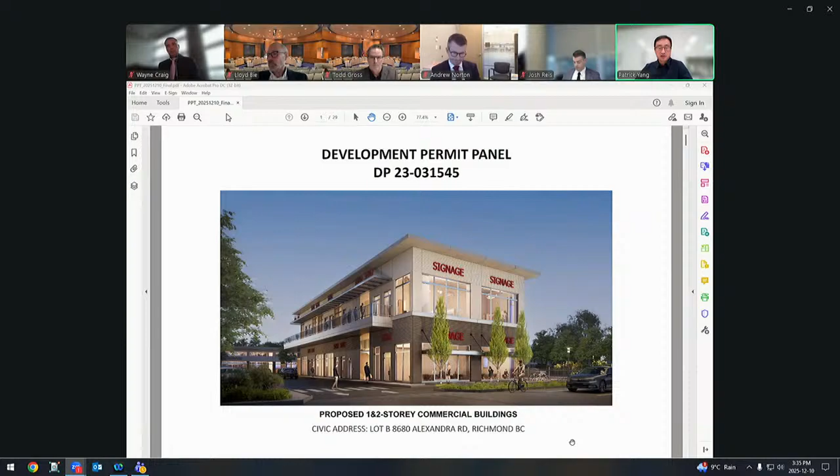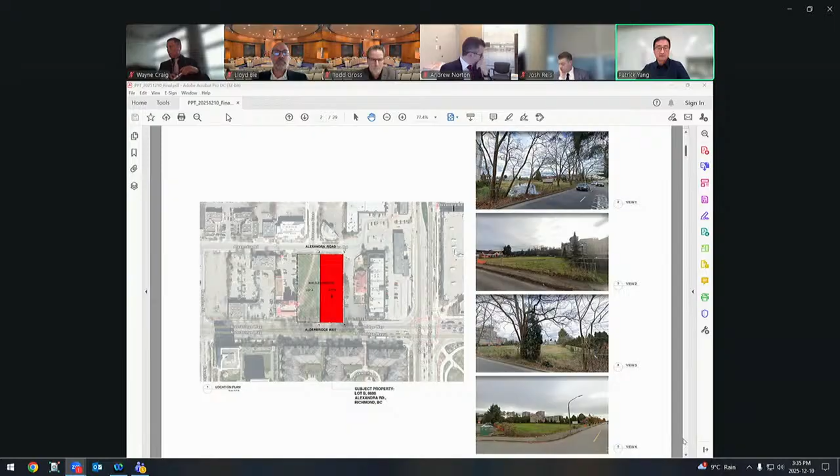This development includes 2 buildings with a total of 14 commercial units. We have worked closely with the city staff to address key urban design issues, ensuring the development aligns with the city's applicable standards and guidelines. The site is a double-fronted lot facing Alexandra Road to the north and Alderbridge Way to the south. The site is currently vacant and located in a C zone.

Given the property's frontage on both Alexandra Road and Alderbridge Way, 2 buildings have been proposed. This configuration promotes architectural variety, enriches commercial opportunities, and creates a welcoming urban streetscape along both streets.

To enhance pedestrian connectivity and accessibility, a 3-meter wide pedestrian path has been proposed between Lot A and B, connecting Alexandra Road and Alderbridge Way. This safe, connected pedestrian path ensures convenient public circulation. A 1.5 right-of-way will be registered on both Lot A and B.

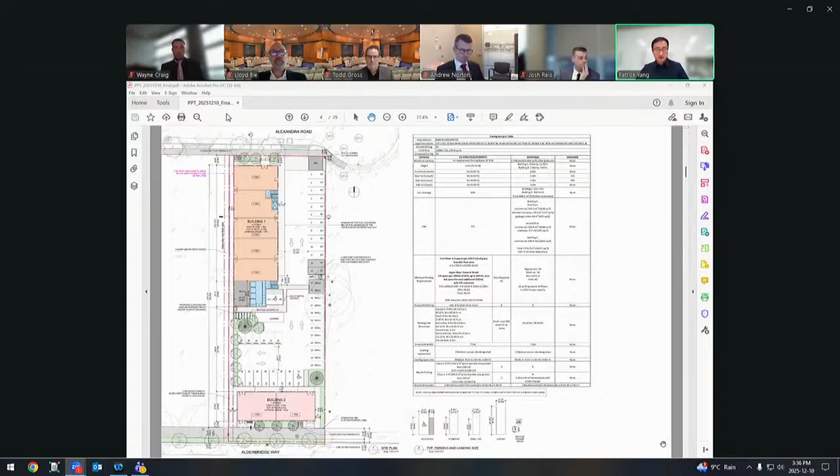Building 1 is a two-story building with 12 commercial units. Waste recycling and mechanical rooms are proposed at the south end of the building.

The building has a street front facing Alexandra Road with a strong architectural expression using large windows, doors, and canopies. The proposed design states a modern Pacific Coast architectural expression, incorporating significant horizontal articulations, along with variations in color, texture, and materials to create an attractive and engaging building.

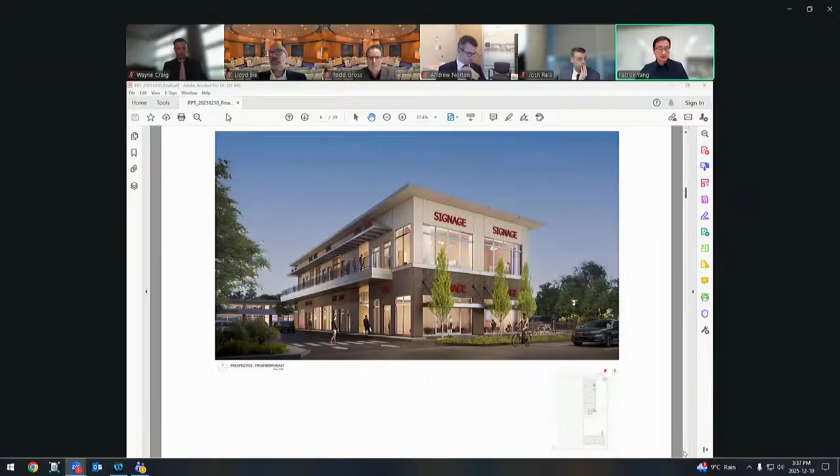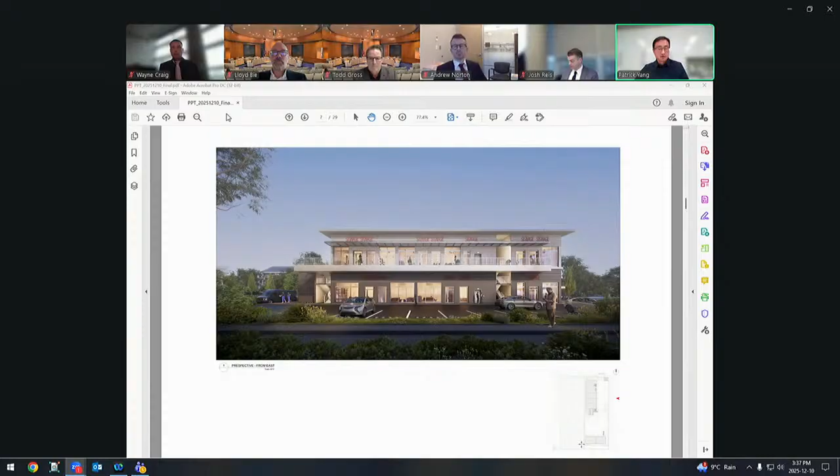On the upper level, an outdoor corridor and an amenity terrace at the south end of the building have been proposed. It helps to create natural surveillance for the driveway and the surface parking area below.

Elements such as outdoor corridors, canopies, and roof projections enhance the horizontal interest across the linear facade. The design of the west building elevation provides a safe and nice pedestrian experience. Large windows and well-positioned doors, together with continuous canopies for weather protection, will increase transparency and visual connectivity between the pedestrian path and the commercial units.

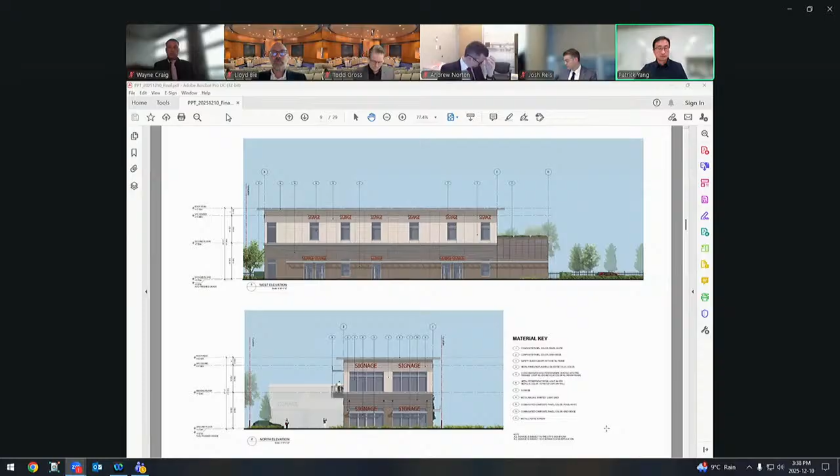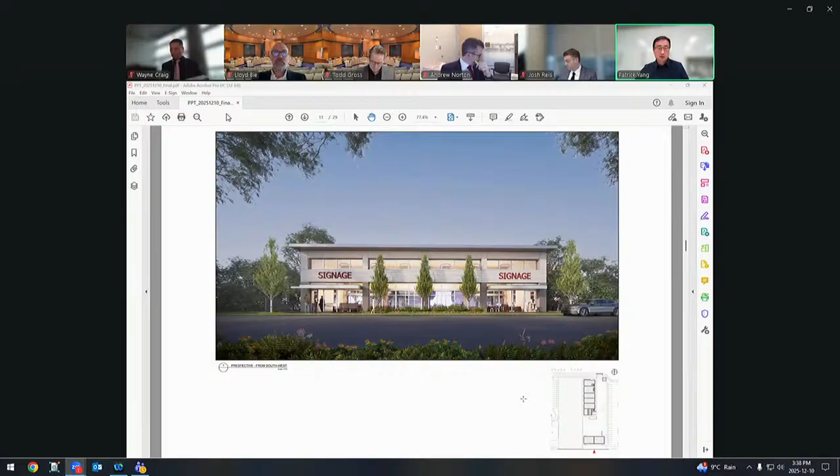Building 2 is a one-story building with 2 units, providing a continuous storefront facade. The large windows and glazed doors, combined with canopies and roof projection, create a strong horizontal expression. The overall design emphasizes small-scale commercial activity with a focus on creating a pedestrian-friendly environment.

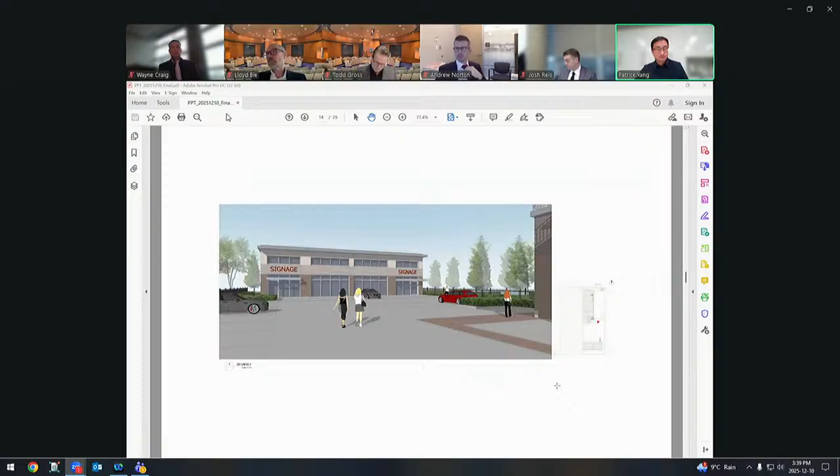Architecturally, sustainability measures have been included in this project by using high-performance building envelopes, LED lighting, and optimized HVAC systems. Mechanical design allows connection to the city's central district energy utility. Water and energy conservation features, including low-flow plumbing systems, will be used in the project. The project will also provide roughing for future rooftop solar panels as an alternative energy source for future tenants.

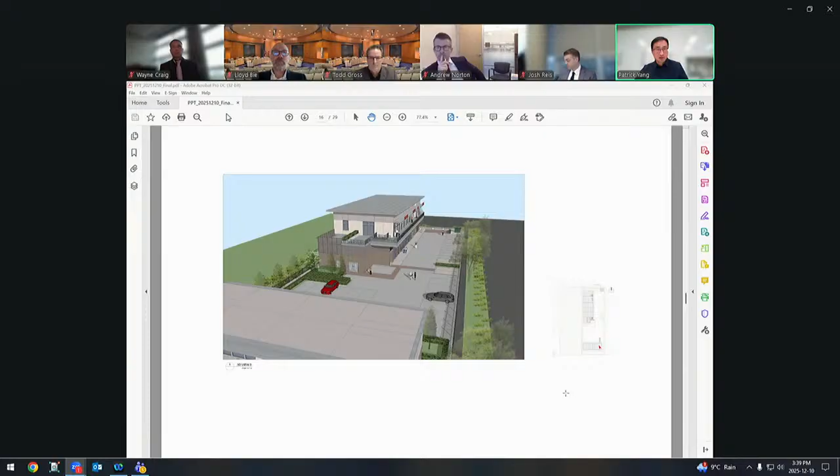The selection of exterior finishes emphasizes enhanced durability while adopting a sustainable approach. Colors and materials are organized to achieve harmony and connectivity throughout the buildings. Building finish comprises a mix of architectural composite panels, with colors focusing on warm gray and light tones. Each floor's composite panels have a smooth finish below and corrugated finishes above to add texture and improve street-level articulation.

We believe this development will bring values and benefits to the public and the city. Next, the landscape architect will present the landscape part of the design.

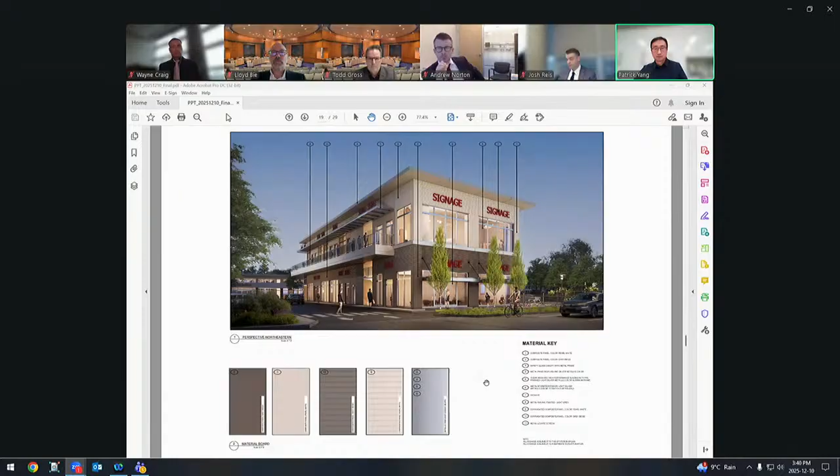There are 4 items to be discussed in the landscape presentation. The first item is the existing tree management.

As you can tell from the screen, there are 2 trees on the neighbors' properties proposed to be removed per the suggestions of our arborist. Also, the trees along the Alderbridge Way will be removed due to the conflict with the future city sidewalk. In order to provide enough replacement trees, the overall landscape design has maximized the tree planting opportunities for the overall site.

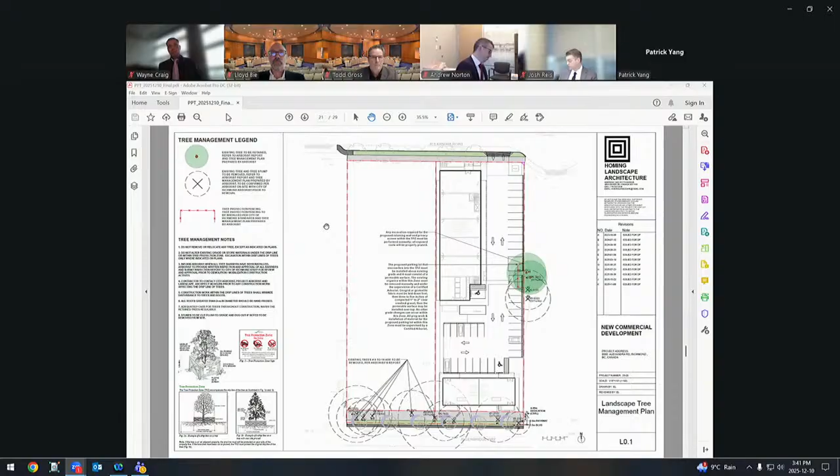Next page, please, Patrick. I believe the overall landscape design has proposed a total of 15 replacement trees on site.

Next page, please, Patrick. The second landscape design idea is trying to create a pedestrian-friendly environment for the users. As you can tell from the landscape site plan, pedestrian circulation paths are provided around building 1 and building 2. Meanwhile, a pedestrian path is proposed along the west property line as well to connect the Alderbridge Way and the Alexandra Road.

For the pedestrian circulations in the parking lot, we used stamped asphalt paving to highlight the pedestrian circulations, to make sure that we create a safe pedestrian environment in the parking lot as well. Next page, please.

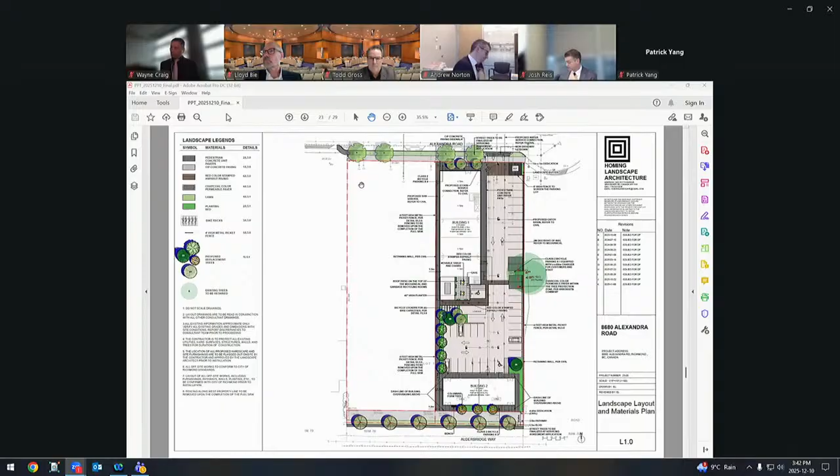The third landscape design idea is to use a lot of native and drought-tolerant plant species in the overall landscape design. As you can tell from the plant list on the left page of these screens, a lot of native species has been used based on their sun and shade conditions on site. We're trying to create an environmentally friendly landscape that also benefits the local ecology as well. Next page, please, Patrick.

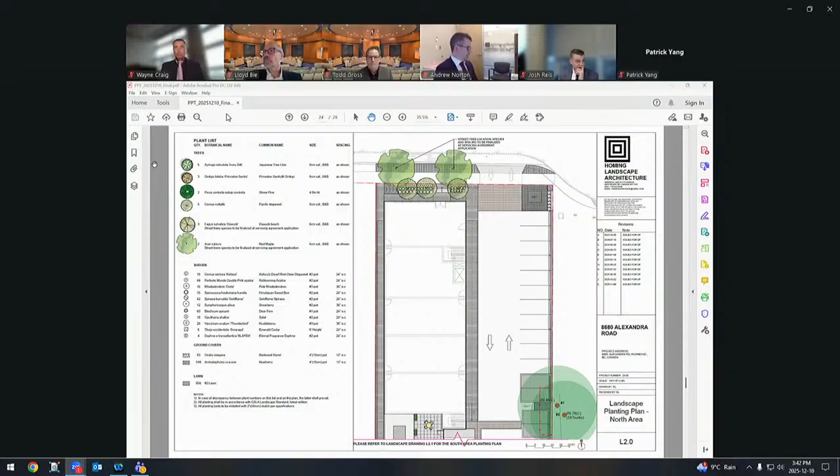The last landscape design idea is to create a safe place for people to use at night. So the overall landscape lighting design tries to use dark sky design principles to reduce light pollution to the neighbors as well. There are 4 types of landscape lighting proposed on site, and no uplights will be used on the project.

For the parking lot areas, we will mainly use parking lot pole lights with a shield to provide enough light. For the circulation paths around the buildings and along the west property lines, we propose to use a bollard light and a wall-mounted downlight to provide lighting for pedestrians. So the overall landscape lighting design intends to create a safe environment at night for people to use.

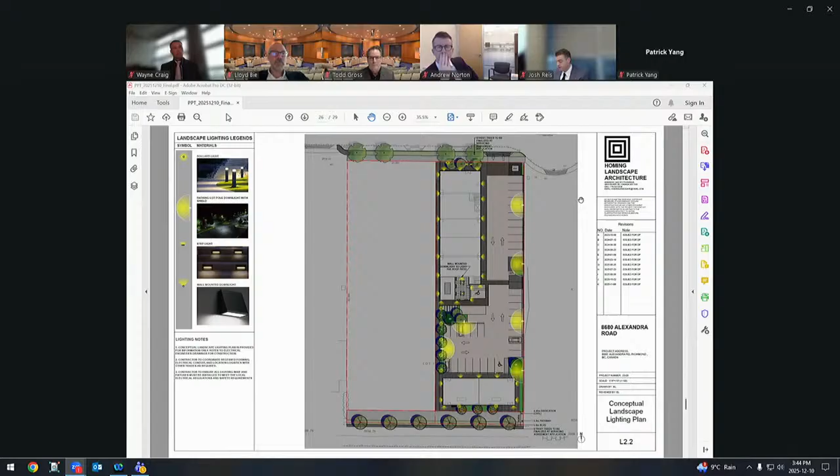Next page, please. So we have considered some landscaping materials. For example, we have used permeable pavers for some parking areas. We also use a 4 foot high metal picket fence along both the west and east property lines to make sure you can see through and to create a safe environment for users on site.

This is the overall landscape presentation. Thank you. Thank you for your presentation. If that concludes your presentation, you can stop sharing your screen.

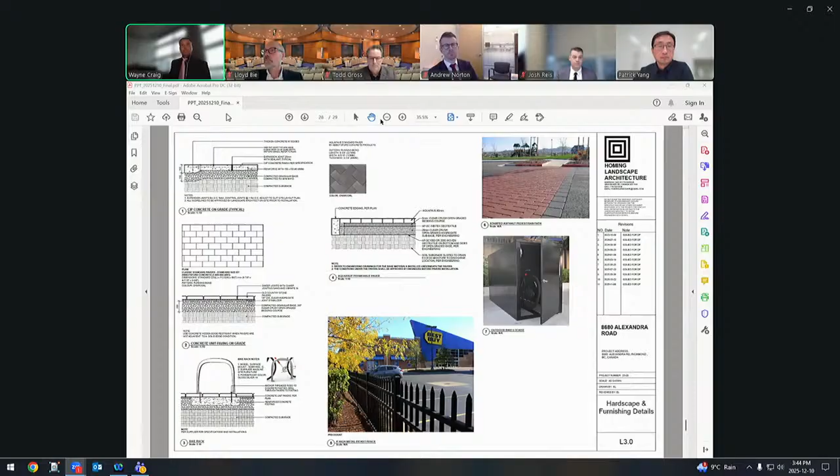Josh, any staff comments? Yes, a few comments, Mr. Chair. As indicated by the applicant in their thorough presentation, a 3-meter wide SRW providing pedestrian right of passage between Alexandra and Alderbridge Way is proposed. The buildings have also been designed to address this walkway area as another active frontage to the building. The buildings are located within the city center district energy utility area and have been designed to connect to the city center DEU once connection is available.

There is road dedication associated with the proposed development along Alderbridge Way, and there is a servicing agreement required at the time of subdivision that will include frontage works, including a multi-use path and boulevard, together with utility and servicing connections. That concludes staff comments. Thank you.

Lloyd, Todd, any questions for staff or the applicant? Yeah, thank you, Mr. Chair. I do have a couple, if I can go first.

I was wondering, there are quite a few trees along the front of it, and I think I read in the package that they're not great trees and stuff. But what I was wondering is about the replacement trees along the front - will they kind of mimic what's in other places? Like when we look on Alexandra at the roadway, there are a number of street trees on the opposite blocks and things. I was just wondering if these trees will match those. And along Alderbridge, what will that look like? As we go along, we see that a bunch of those trees in the front will disappear. Further to the west, there is a row of trees. So will these all match, or will they be different, how will that look?

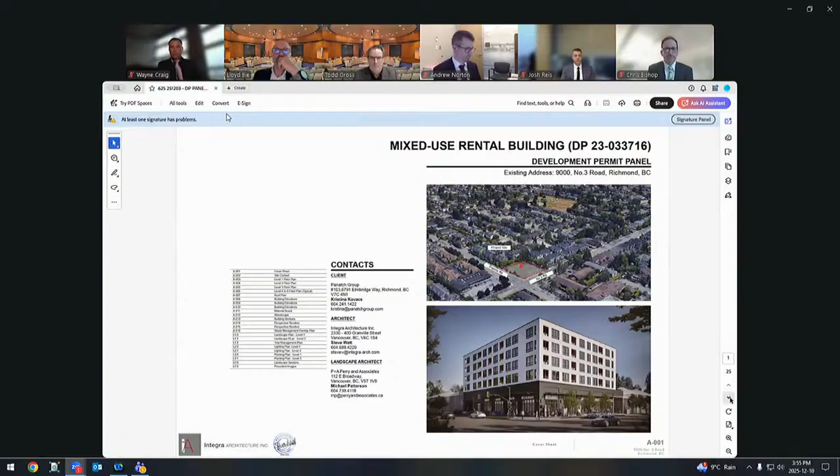So the site occupies a prominent corner location at number 3 and Francis Road. It's a former gas station site, flanked by townhouse projects on the east and south sides and a low-rise commercial development across the street to the west.

The site has a number of constraints that have limited or influenced our design. It is contaminated land, and there's a high water table being in Richmond, which limits our excavation options. We don't have a lane, which limits access and servicing opportunities.

We have an SRW on the east side, which limits our buildable envelope and tree planting opportunities. We're also respecting the 2-meter road dedication and 2-meter setback on the west and north, and a 5-meter corner cut, all of which compresses the buildable envelope. On-site garbage collection is obviously a challenge too, restricting our turning and operational movements, all of which has heavily influenced our back-of-house design.

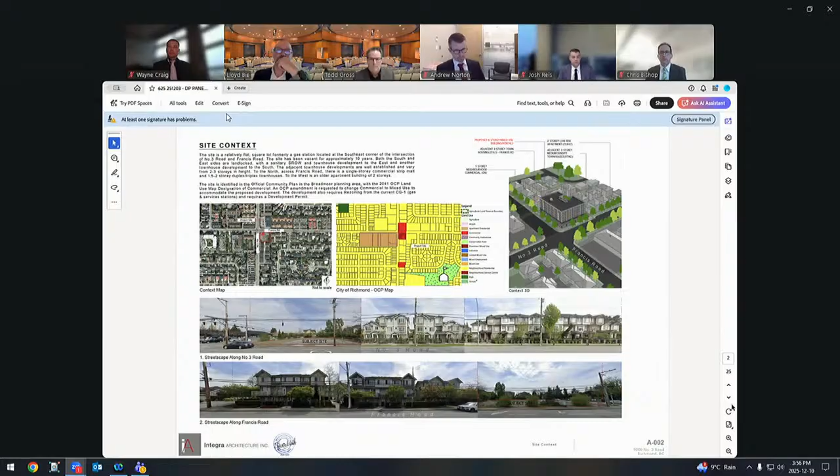Level 1 site plan: our design strategy basically allocates all the commercial to the principal public street fronts, connecting it all to maximize flexibility. Then we have the residential lobby on Francis further to the east. Parking forms the balance of the remainder of the site and accommodates the garbage storage and collection requirements. We've got 2 parkade entries, located as far from the intersection as possible.

On level 2, we've added additional parking to meet the needs of the development, making use of the 2 possible entries, one for the lower level, one for the upper level. We looked at an internal ramp, but that works out to be completely impractical given the space requirements. To accommodate the garbage collection, the building needs to be stretched vertically, which in turn increases the commercial and residential lobby height.

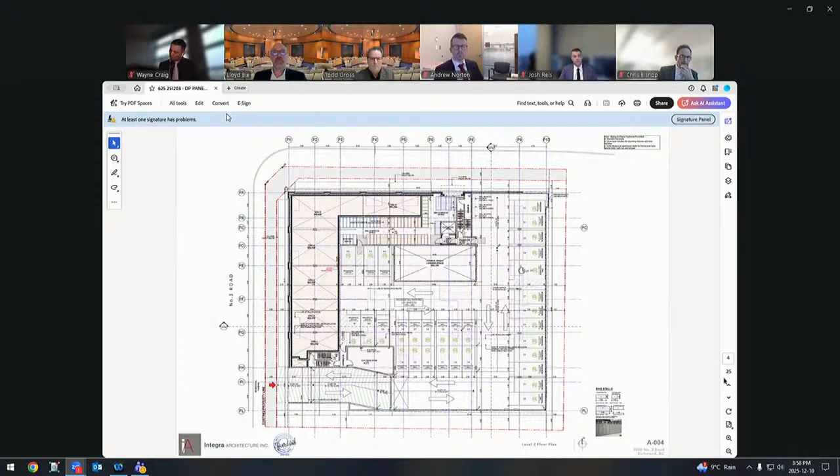Level 3 is the podium level on top of the parking and the commercial units. This is where the residential units begin. On levels 3 through 6, to respect the lower density and height of the neighbouring townhouses and to mitigate privacy and overlook concerns, the residential hugs the north and west property lines and is pushed in from the east and south to maximize the setback to the existing buildings.

This creates an outdoor space opportunity on the southeast corner of the parking podium on this level for the common outdoor amenity. It's an ideal location that takes full advantage of sun for much of the year. The space is also overlooked by about half of the units in the building, providing natural surveillance, which will encourage use and a sense of community. It includes a children's play area, urban gardening, and social gathering spaces, which Michael will touch on further later. For the size of the project and contribution to the community, it was decided more rental units were a better use of the space rather than providing an indoor amenity space.

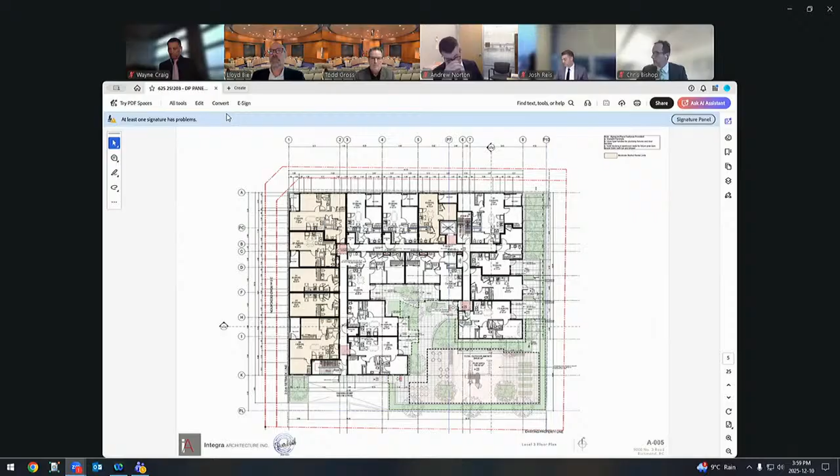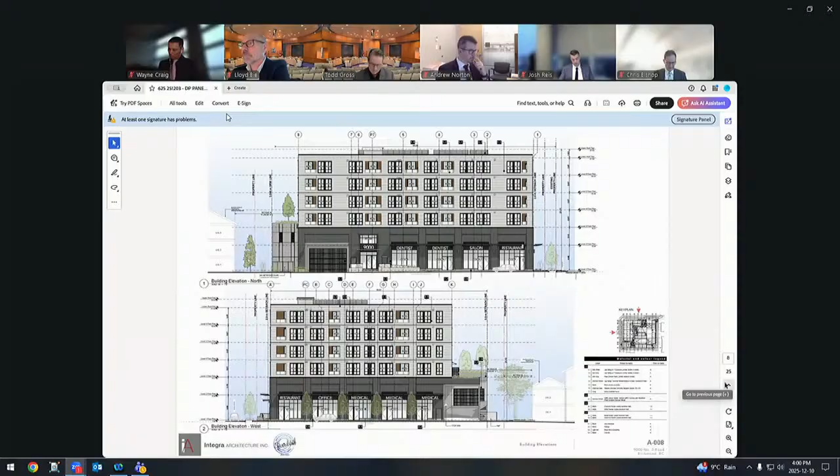We have a brick podium base proposed for the commercial frontage on the 2 public street fronts, with tall storefront glazing and a continuous glass canopy. The brick will have some nuance to it with some recessed areas to better express the commercial frontages.

The architectural expression we're aiming for is a very modern, clean form approach with few simple materials. We're trying to create a simple grid pattern of openings in a field material on a contrasting base to anchor the project and describe the transition of uses. Balconies are considered cozy private nooks, clad inside with wood-tone fiber cement material, adding color and warmth under the overall skin of the building. We've worked hard to avoid side-by-side balconies to improve livability and privacy. Materiality and form are purposefully simple; the design strength is in its simplicity.

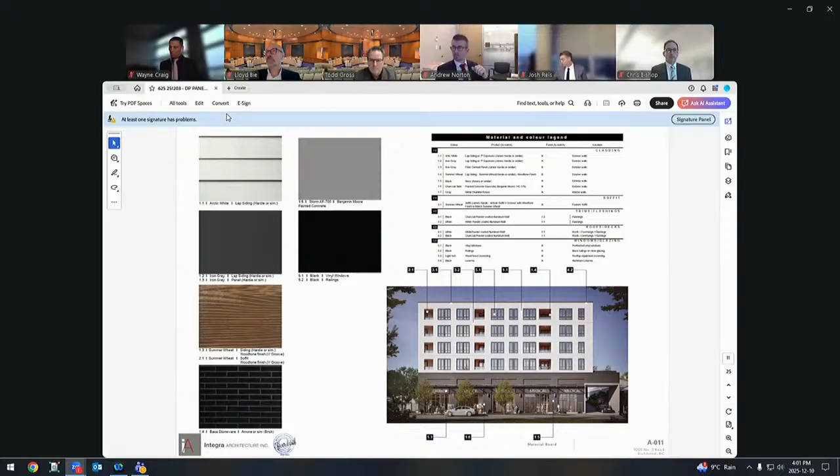On the south side, we've provided 7.9 meters between the townhouse and parkade, and 14.26 meters from the townhouse to the apartment building. These measurements are to the side yard conditions. There are 2 townhouse buildings where there is a rear setback condition, and those setbacks are exceeded even further.

Various measures are proposed to reduce potential conflicts between pedestrians and traffic entering and exiting the parking, particularly the upper parking. This includes contrasting colored drive aisle signage and convex mirrors. They're obviously right-in, right-out as well.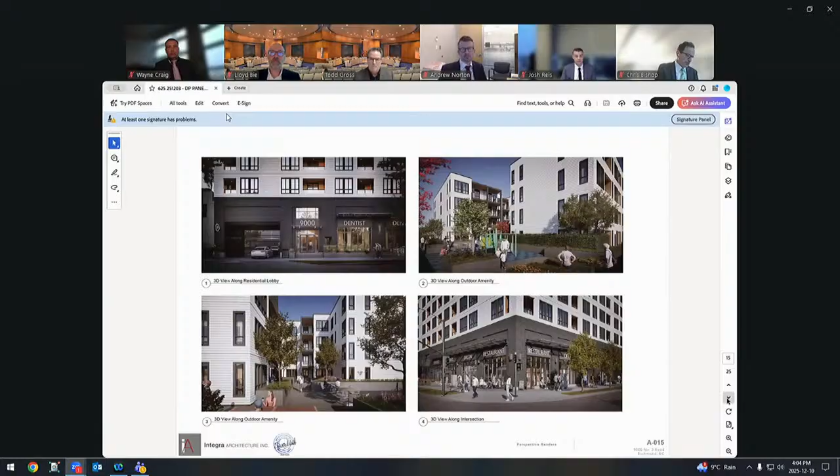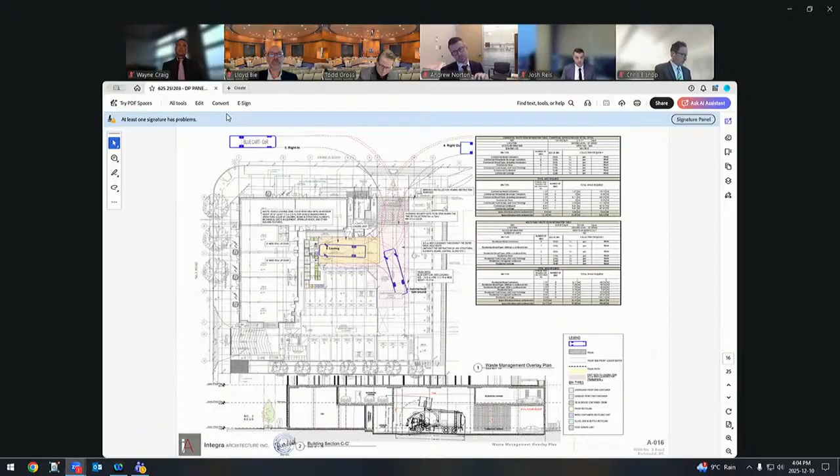Next page would be the servicing plan, which shows how it was a challenge, but we managed to make all this work with the full turnaround for the garbage truck, and we have an extra height area for the overhead tipping maneuver. I'll now pass to Michael for the landscape presentation.

Thanks, Steve. Yeah.

So this is the ground floor plan, and you can see that we've got an urban streetscape along both Francis Road and Number 3 Road, and we've articulated the CRU units with a planter separating the CRU units, and we've also provided the Class B parking. Similarly, on Francis Road, we've done the same with the CRU, and then you can see that the entry lobby is a little bit more separated or clearly established through a slight change in grade. So we have a few steps up to the entry lobby, or a 5% sloping ramp, and a little bit more landscape to articulate that entry.

Along the east side, as Steve already mentioned there's an SRW, so we're not able to get trees or permanent landscape installed along the east side. So we have a 6-foot height removable wood fence and pavers on grade, and then planting. On the south side, we are able to get trees, so we have 8 trees planted and then an understory of shrubs, giving a layered planting edge along that south side. And again, we have a 6-foot high solid wood fence.

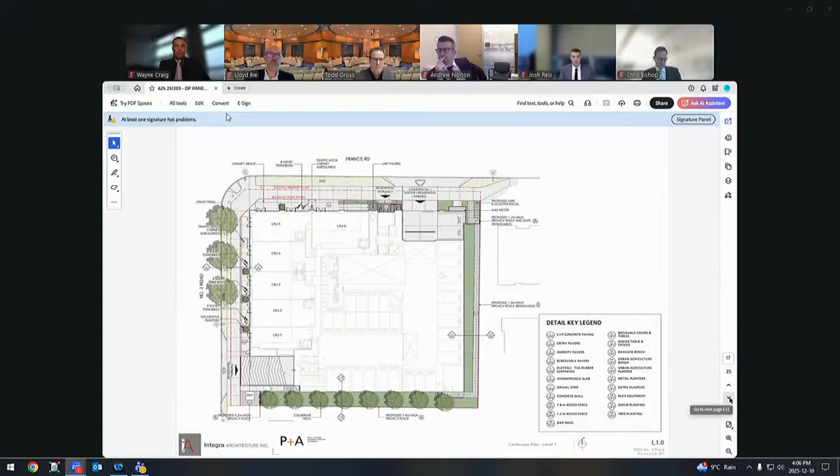The roof deck provides amenities for the adjacent units. So the units that have frontage on that courtyard are able to have patios that link out directly to the courtyard space, which helps to keep that space animated and provides good overlook for safety and security. As Steve mentioned, the building units above look down on this space. We've provided children's play, community gardens, and social outdoor dining, so a number of activities for the residents in the building. We have landscape planting around the edge to buffer that edge and views up, and we've provided a number of trees at this level as well to help provide shade during the summertime and again provide that layered planting scheme.

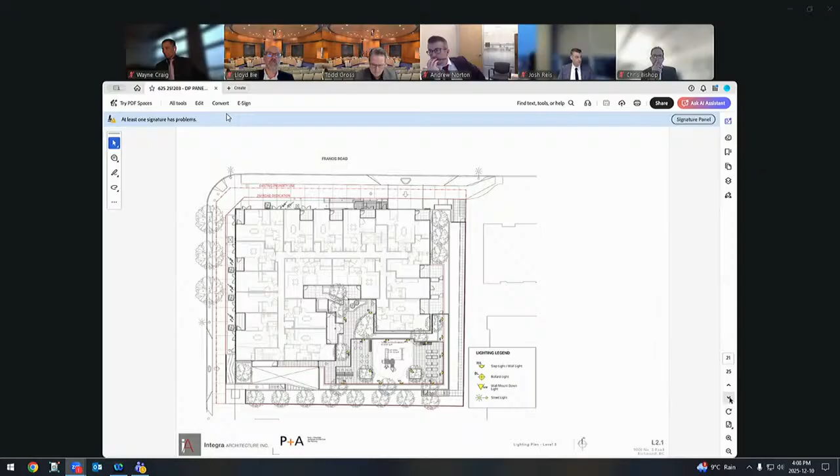We're providing a variety of plants, trees and shrubs. We do have vines specified to grow up the building face, both on the east and south side. And then, as Steve mentioned, we have plants on the upper level that are meant to come over the edge and soften it.

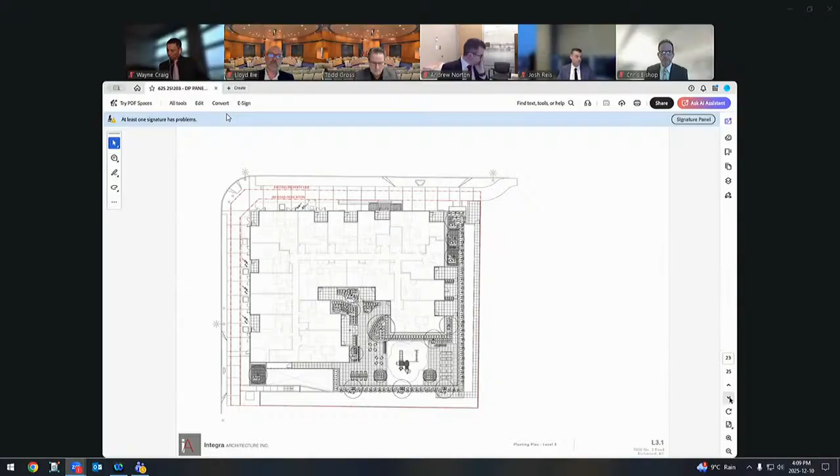This is our plant list for the roof deck. Again, a variety of plants providing seasonal interest. We really want to make sure the planting is inviting and looking fresh and green through the seasons, and is a lower maintenance type of planting so it's easily maintained by the strata.

These are some sections through the site. We have the commercial frontage on Number 3 Road at the top left, showing the bike racks, the sidewalk, and the street trees along that edge. Section 2 is in the statutory right-of-way and shows the fence, the pathway, and the plant material and vines growing up the wall. The one at the far right is the south building edge, a similar condition except with the addition of trees.

On the lower left, we have a section through the podium. We are providing ample soil depths for the trees, as you can see in these sections. Lastly, the lower one on the right is through the amenity area, showing the playground and the social seating and community garden area.

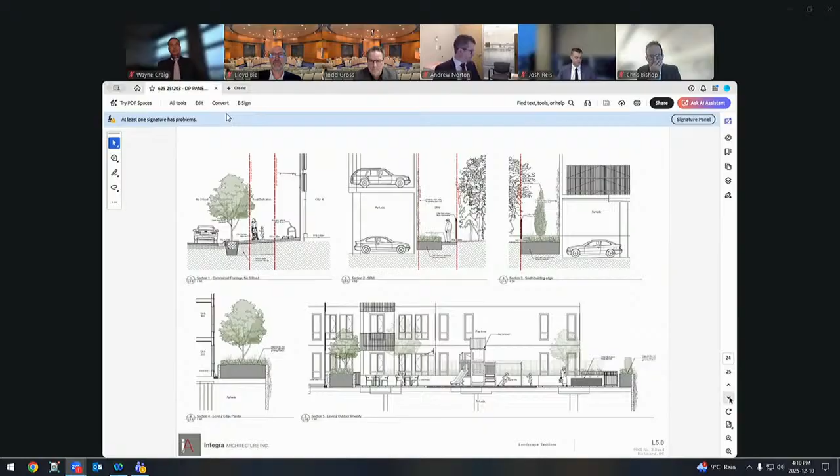That's the conclusion of the landscape presentation. Thank you very much.

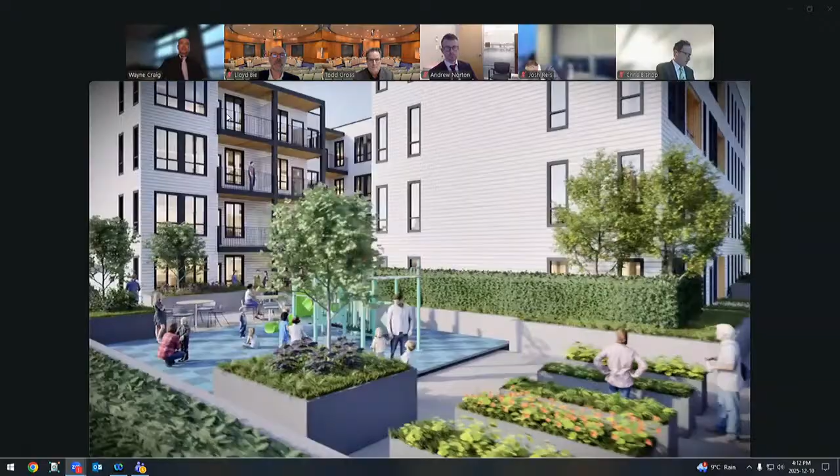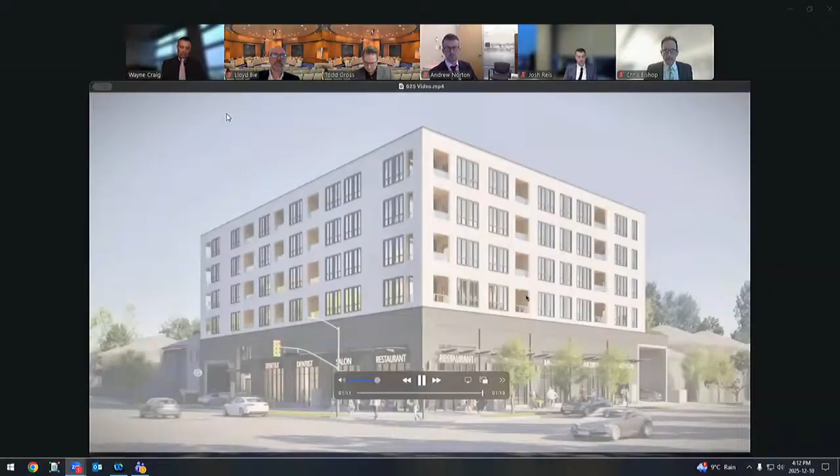Okay, that concludes our presentation. Thank you very much.

Josh, any staff comments? Yes, Mr. Chair. The proposed development is a 6-story building with 64 rental units, 7 of which were secured as moderate market rental units at the time of the rezoning application. All required replacement trees are being provided on site, and an on-site irrigation system has been provided to ensure the trees are adequately irrigated.

100% of the units on site will meet the city's basic universal housing requirements. In addition, there is a servicing agreement associated with the rezoning application, at which time we secured frontage improvements along both road frontages, as well as intersection upgrades, new traffic signal cabinets, storm upgrades, and sanitary and water connections. That concludes staff comments.

Thank you. Todd, Lloyd, any questions for the applicant or staff? Through the chair, I just have one landscape comment. On level 3, I noted there is a Styrax japonicus tree identified in close proximity to the playground, and given that they are prone to heavy seed and leaf drop, I would suggest replacing it with an alternate species.

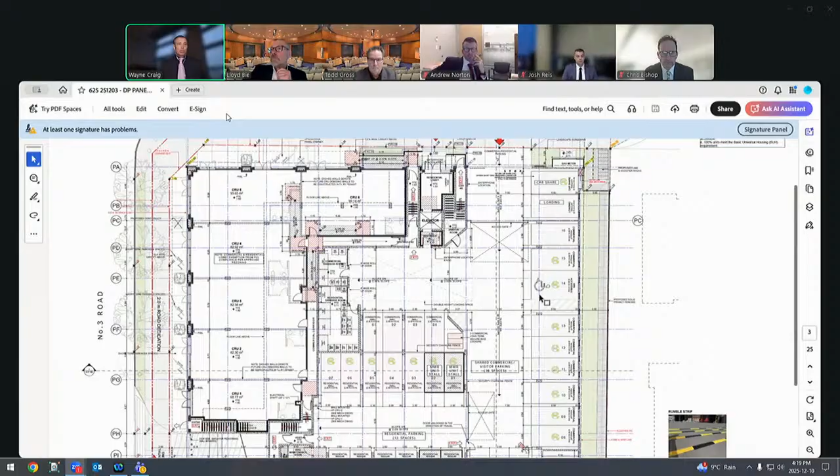Similarly, if you could just comment on any measures for vehicles exiting those two parkades, in terms of being aware of pedestrians using the sidewalk. So from the Francis entry, we don't have any mirrors or anything there, as we're imagining that would be a much lower speed entry exit.

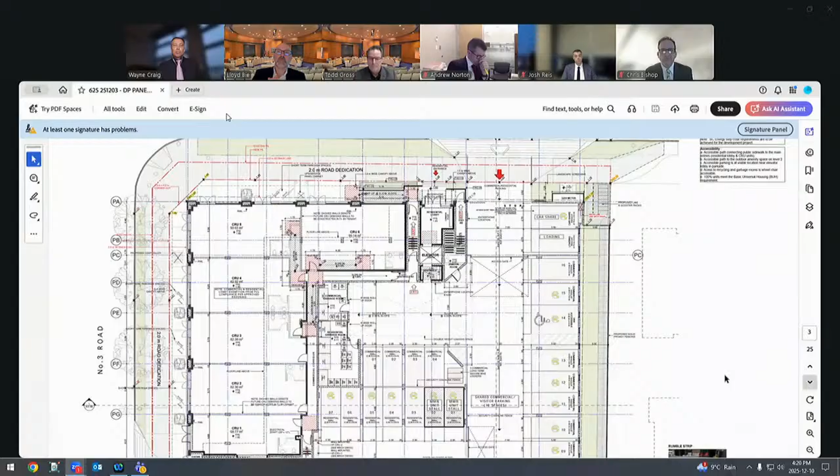Visibility is really good eastwards as you exit, and it's decent to the west as well, because we allow some space between where the effective enclosure of the parkade is and where the sidewalk is. So you're going to be almost at the sidewalk with full visibility through your side windows. On the second level, we are providing a rumble strip and convex mirror at the approach to the sidewalk. Strips, obviously, to control the speed of exit. Thank you.

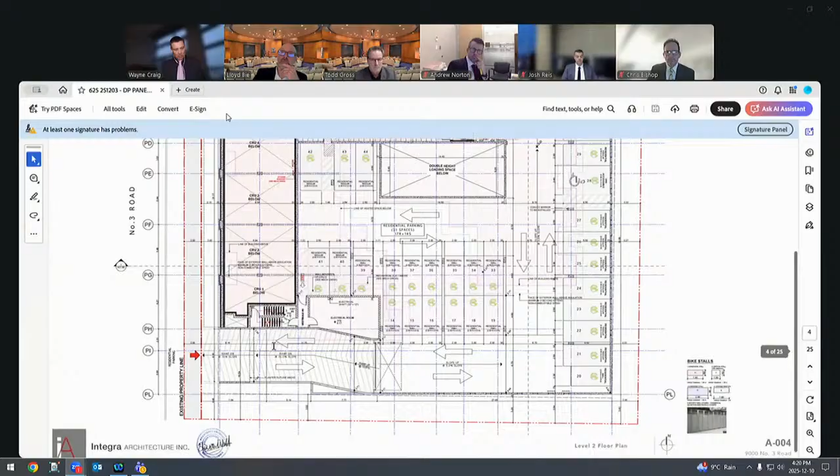Any public correspondence or members of the public wishing to address the panel today? Thank you, Mr. Chair. There are no speakers here in chambers, but we did receive a couple of correspondences from the public, and planning staff have responded. The first expressed concern about traffic safety and congestion at the intersection of No. 3 Road and Francis Road. The second expressed concern about the consultation process with residents.

Mr. Chair, if I may, to further elaborate on Mr. Bishop's response: the first piece of correspondence from Ken and Arlene Glynn concerned traffic at the Francis and No. 3 Road intersection. As part of the rezoning application, a detailed traffic impact assessment considered all traffic anticipated from the development and indicated it was not anticipated to have a significant impact. As part of the servicing and frontage works, there are required intersection signal improvements, including a new signal box, to help with left turn traffic from both the north and south approaches.

The second piece of correspondence is from Chris Jensen. Staff have again responded, and received correspondence from the applicant indicating the developer has worked with the neighboring strata. The proposed improvements along the east property line include a new 1.8 meter tall fence, as well as landscaping and vines along the eastern elevation to soften the interface with the existing townhouse development to the east. Josh, along that last point, is there an irrigation system to feed those vines to ensure they thrive?

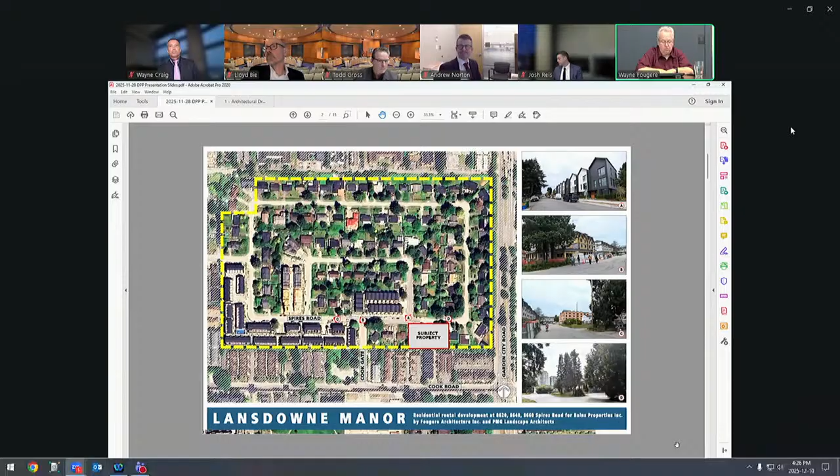In July 2022, Council approved a rental tenure policy that dramatically increased the potential for rental housing in the Spires Road area. The original 1.2 maximum FAR for multifamily developments in the area was rescinded. In its place, new developments now require a minimum FAR of 2.0 and permit a maximum of 3.0 FAR. The first 1.2 FAR is permitted to be strata or market rental. 50% of all additional density must be developed as LEMR housing, with the remaining permitted as market rental.

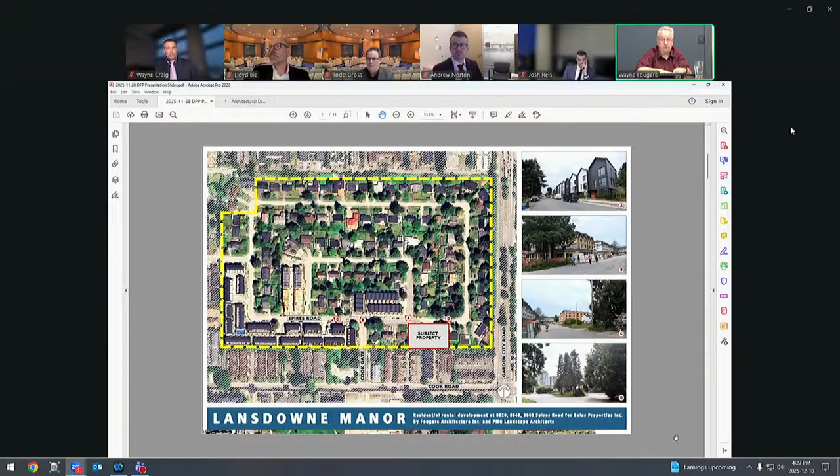Based on this policy, our project is being developed as a 100% rental building. This 3-lot consolidation is a net area of 2334 square meters, and on it we're proposing 90 homes in a 6-story building consisting of 5 stories of wood frame construction over a non-combustible ground floor. 68 of the homes will be market rental, and 22 homes will be affordable rental housing. The development has a density of 2.73 FAR.

There are 27 parking spaces including a car share and 2 accessible parking stalls. Transportation demand management measures include a transit pass program, provisions of a car share facility, and a small-sized loading space.

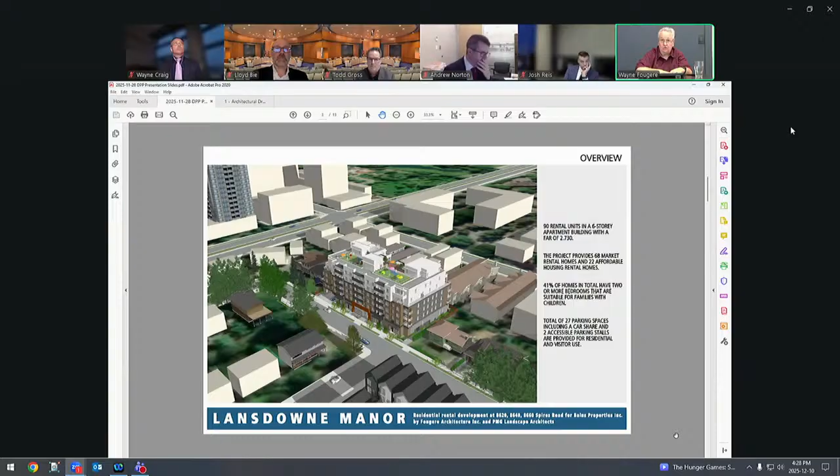The ground floor is positioned centrally on the site with the pedestrian and vehicle entrance off Spires Road. The parkade and service rooms are screened by a centrally located entrance lobby, an indoor amenity space, and 4 ground-oriented units facing the street. The vehicle access is provided at the east side of the building. There are walkways on the east, west, and south yards that provide exiting from the building and access to several service and bike rooms. All on-site walkways are at least 1.6 meters wide and have a maximum slope of 5%.

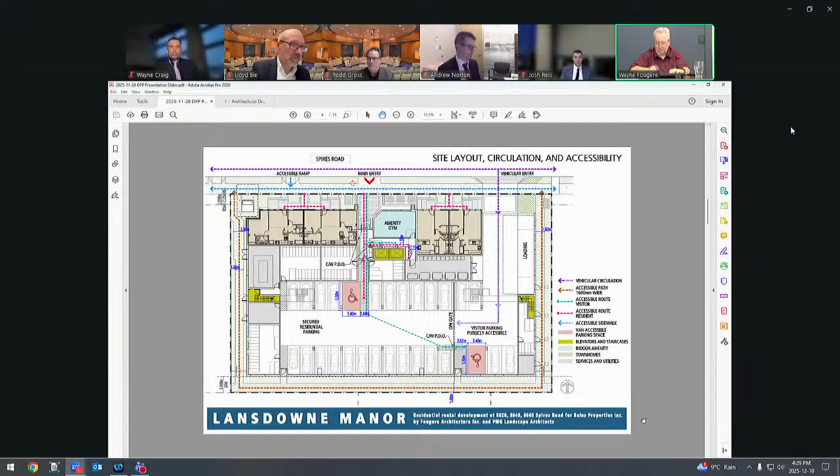The building above the ground floor is a U-shaped building oriented to the south to maximize sunlight penetration for homes facing the podium courtyard. The top 2 stories have increased setbacks along the east, west, and south yards.

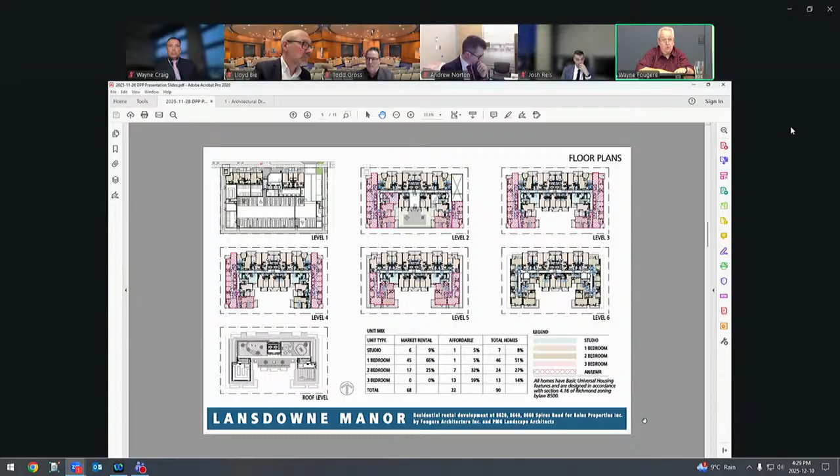All homes have basic universal housing features, designed in accordance with Section 4.16 of Richmond's zoning bylaw. Aging in place features will be provided for all homes.

The indoor amenities are located on the 1st, 2nd, and 6th floors. There are 5 amenity rooms, including the 43 square meter gym near the entrance lobby, the 51 square meter multi-purpose room that has access to the podium open space on level 2, a 40 square meter guest suite on level 2, a 12 square meter shared workspace, and a 12 meter conference room on level 6.

Common outdoor spaces are located on the podium and roof levels. And now Ewan will talk about the outdoor space and programming in detail.

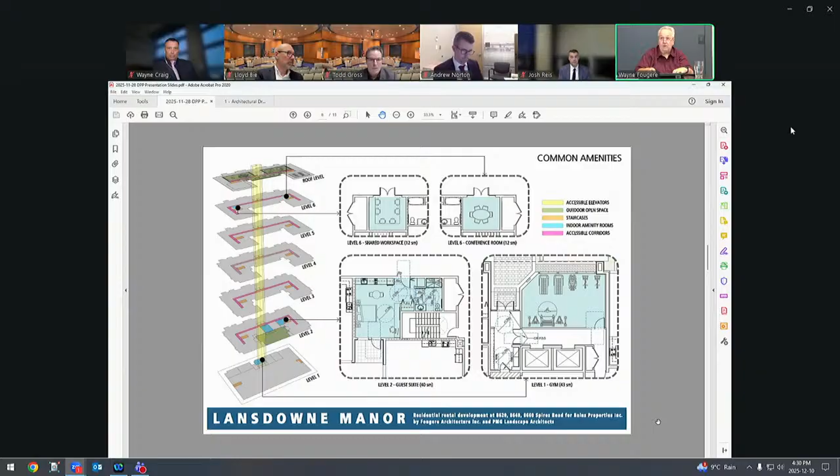Thanks, Wayne. In terms of the landscape along the road frontage, which is the north property line, our goal is to create a streetscape that feels attractive, welcoming, and friendly for the pedestrian.

We have used layered landscaping, such as canopy trees, street trees, and low-maintenance shrubs to bring seasonal interest and a soft edge between the sidewalk and the building. At the main entrance, we have added bike parking and a seating area. This not only provides convenience, but also gives pedestrians, residents, and visitors a comfortable place to interact.

On both sides, west and east of the property, a landscape buffer has been added to provide privacy, soften the building edges, and create a smooth transition to the neighboring properties. At the back of the building, a walkway connects to these two side walkways, forming a continuous loop for pedestrians to walk around the site.

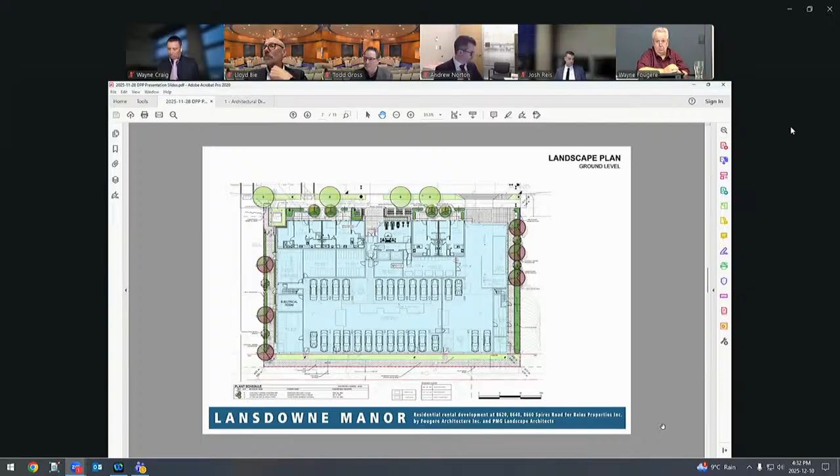We have also worked closely with our arborist to preserve as many existing trees as we can along this property edge, using permeable paver in the tree protection zone.

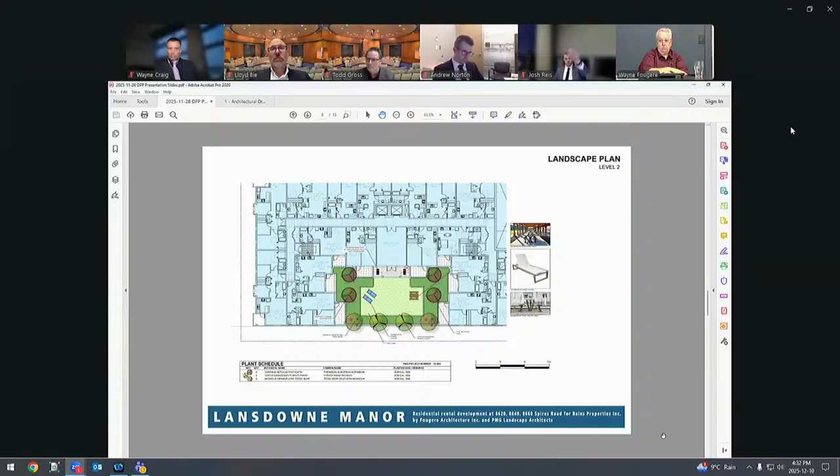On the podium level, the amenity space sits right in the center of the courtyard. This space is mainly for adults, with an open lawn area, lounge seating, a picnic table, and chess tables. The units around are separated by 3-foot-high raised planters, which contain shade trees and a layer of shrub. These not only provide privacy but also create a lush green landscape area on this podium level.

The roof amenity area is designed primarily for children, but we also include some lounge seating for adults. The layout is divided to support different age groups, ensuring safe and age-appropriate play while giving parents clear sight lines to look after kids.

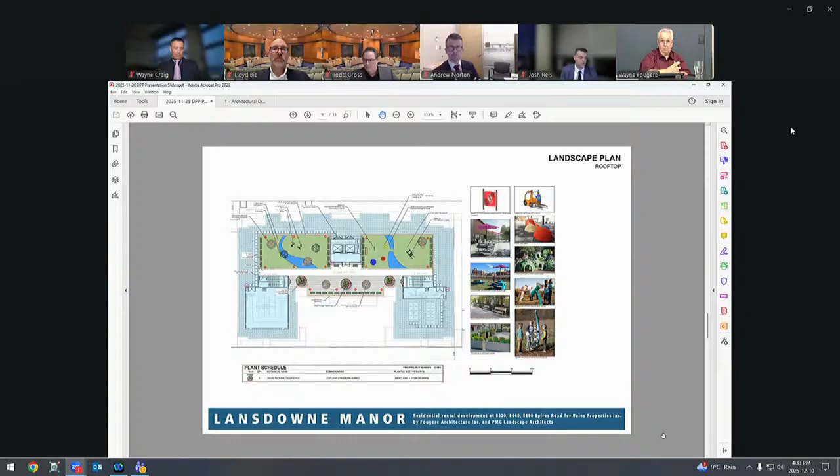The one on the west side is for ages 5 to 12, and the one on the east side is for ages 0 to 5. Planters and small ornamental trees are provided to enhance the aesthetics on the roof. Overall, we are providing 22 replacement trees with hundreds of drought-tolerant plants. Automatic irrigation will be provided to all the landscape.

That's all for landscape. I will return the presentation to Wayne.

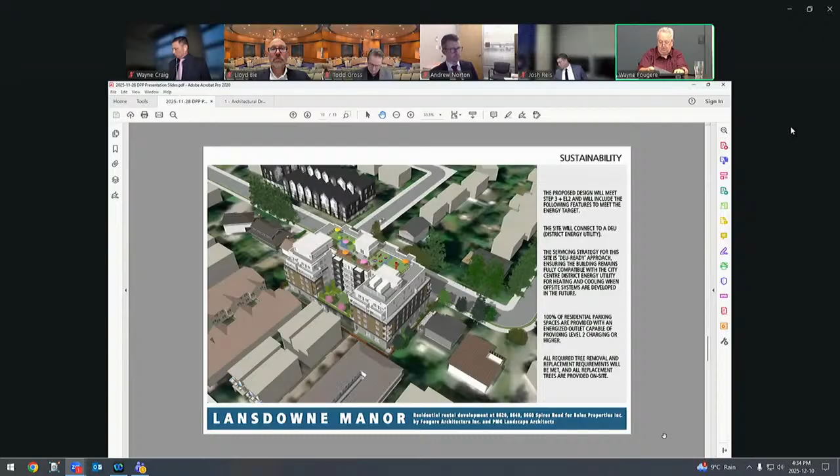Thank you, Ewan. The design will meet a Step 3 and EL2 energy target. The building will connect to the district energy utility when it's available. The servicing strategy for this site is a DEU-ready approach, ensuring the building remains fully compatible with the city center district energy utility for heating and cooling when off-site systems are developed in the future.

The building has a 4-story brown base that acts as a street wall. The upper 2 stories have a white finish. These lighter top stories, with the additional setback, reduce the overall mass on the east, west, and south elevations.

The first floor north elevation provides the street-fronting homes with a different character from the rest of the development and provides a distinct podium base for the upper floors. The interplay of different materials and colors helps emphasize the variety and articulation in the built form.

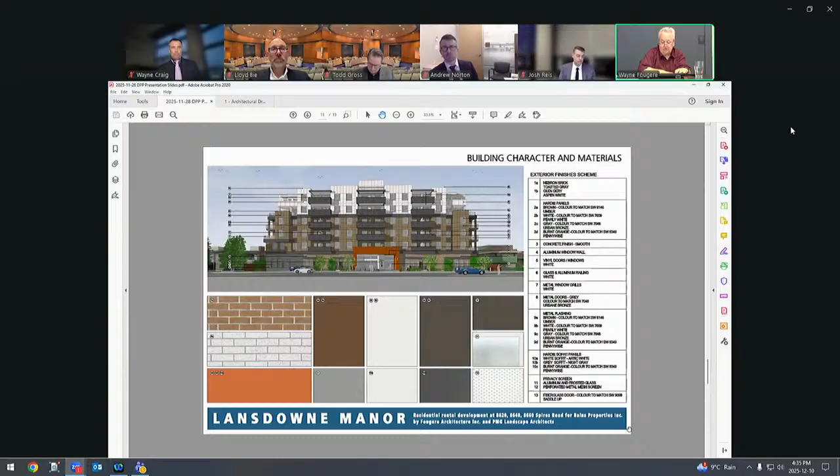To improve the relation with neighboring buildings, the top 2 stories have increased setbacks along the east, west, and south yards.

The framed entrance and ground floor amenity room are grouped together in a contrasting color and material to create variety and to define the building entrance.

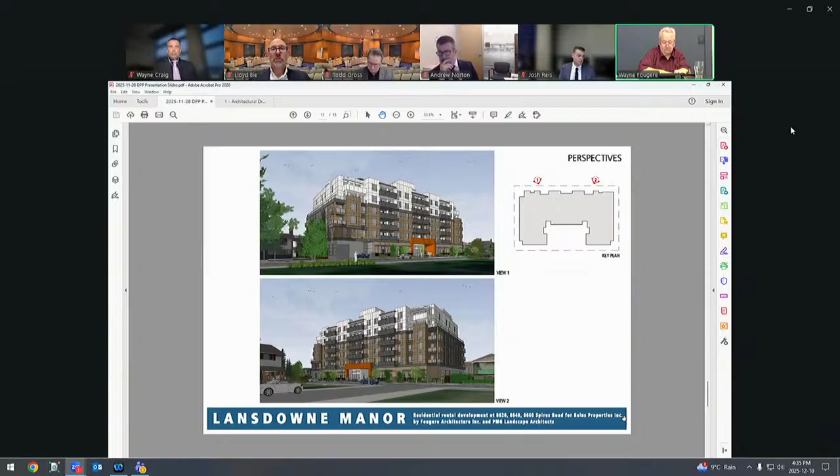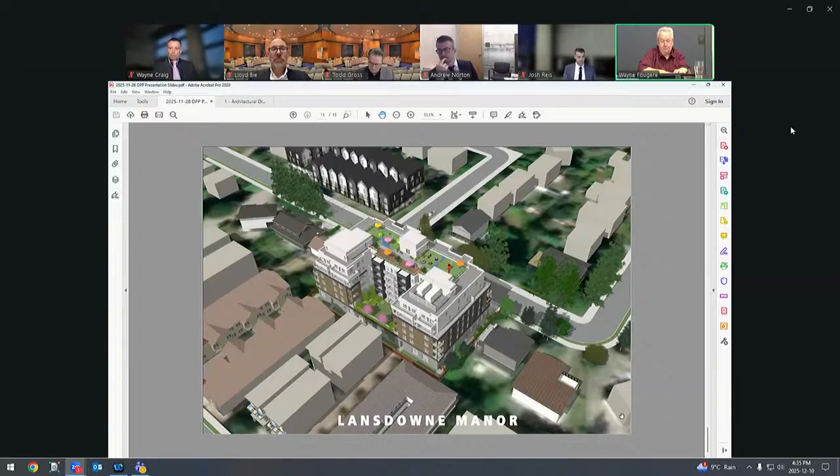Thank you, Wayne. Josh, staff comments? A few comments, if I may.

The project provides, as outlined by the architect and applicant, that there will be 22 affordable housing units provided on site as part of the development, meeting the city's low end of market rental program requirements.

The subject site is located within the provincially designated transit-oriented areas. As such, residential parking is not required.

The applicant has proposed a total of 22 stalls, as well as a significant transportation demand management package that includes transit pass programs, car share parking stall, as well as 140 class 1 bicycle parking located on site.

There is an extensive servicing agreement required that was secured as part of the rezoning application for the design and construction of road and engineering improvement works along the property frontage, together with the utility connections for water mains, storm, and sanitary sewers. That concludes staff comments.